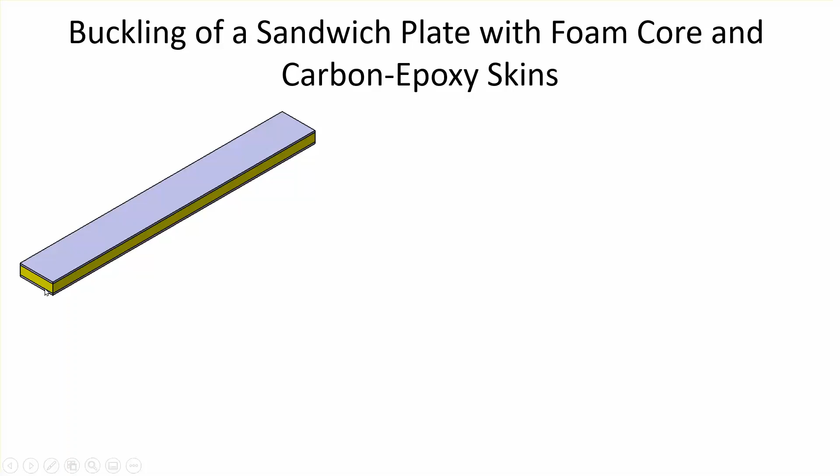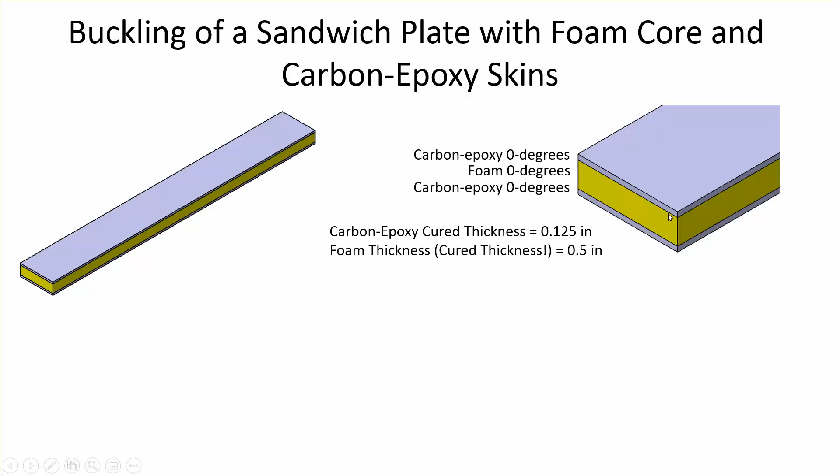The thicknesses are, this is also drawn to scale. The thickness of the foam in the middle is half an inch, and the skins on the top and the bottom are 1/8 of an inch. Okay, so the core is 4 times thicker than these skins. Now, we're going to assume that the edges of this strip, this plate, they're all simply supported, okay? And it's being compressed by a force Nx.

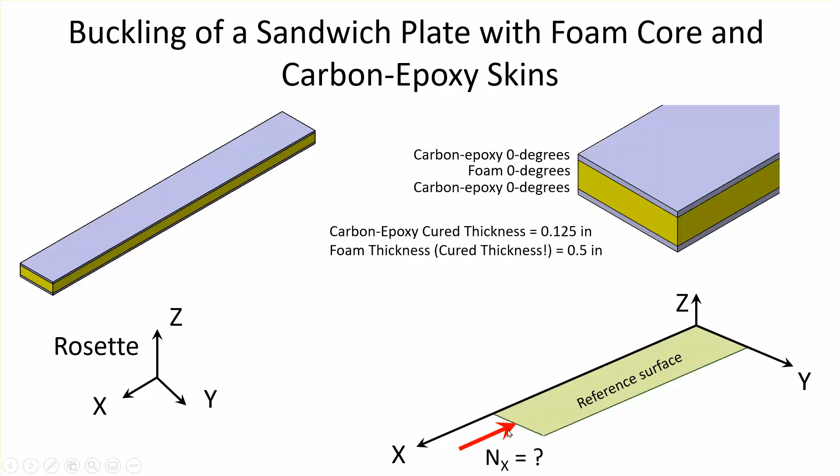And remember, Nx has the unit, you can think about it as force, but for shell problem, you can think about it as force per unit length, okay? Now, in my first video, one of the original drawings had a load on this side too. It was saying compressive load on both sides, but really you don't have to draw that Nx. That Nx is effectively the support because these edges are all simply supported. That Nx is the reaction force due to the simple support at that side. In this segment, I just deleted the red arrow on the right side.

Okay. So here, simply supported on all four sides. The simple support conditions were already given to you in the previous segment, but it's also written here for your sake. Total laminate thickness is 0.75. Remember, the core is 0.5, and there are two 0.125 skins. Okay, the material properties are taken out of the East Carolina's series on hand calculations for composite design, and I'm going to assume that, yeah, the carbon epoxy is right here, and oops, this is not right.

Oh yeah, and then so in CATIA we're going to be doing a 2D orthotropic material for carbon epoxy, and foam is 100,000 psi. It's a little bit high for foam, but that's okay. And the Poisson ratio is 0.45. So I'm going to assume that foam is an isotropic material with these two properties, and the skins are orthotropic like that.

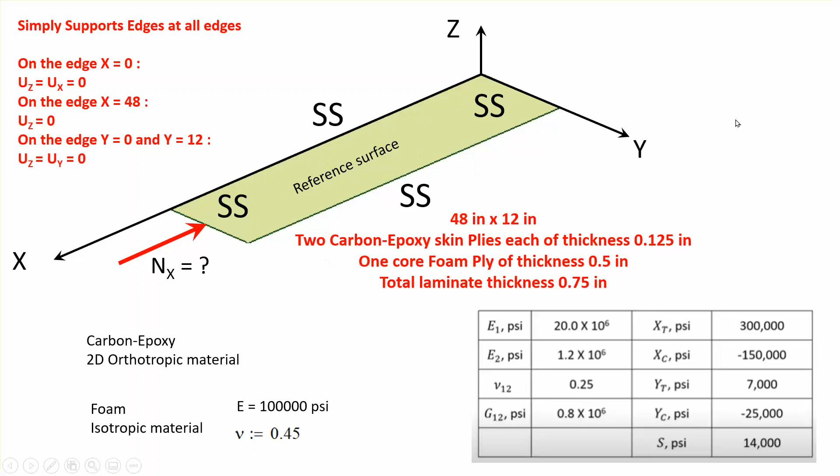Now, I was going to say, because the thickness of this core is relatively large compared to the overall dimensions and also the thickness of the skin, it may be a better idea to do the core, the foam, as solid elements, but we don't have that option in CATIA for composites. So the composites in CATIA, they're all shell elements.

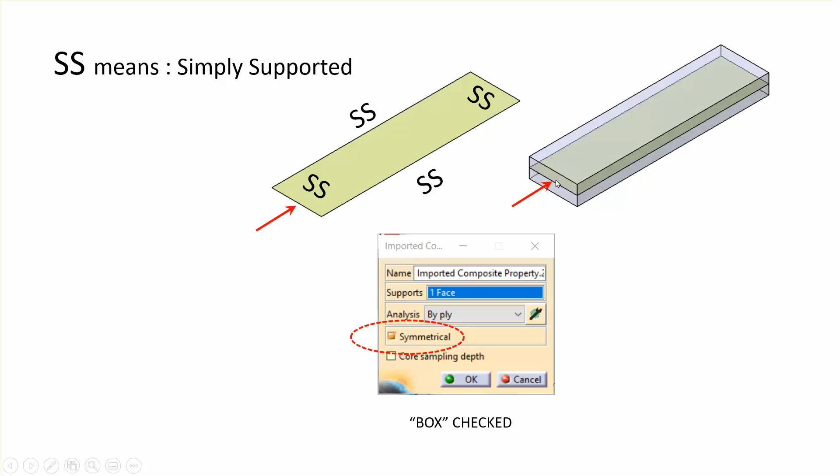Okay. So just keep in mind that when you put this thing together as a stacking of laminas, and later on you have to import it, you make sure that the symmetrical geometry is checked. That means it's symmetric with respect to that middle plane.

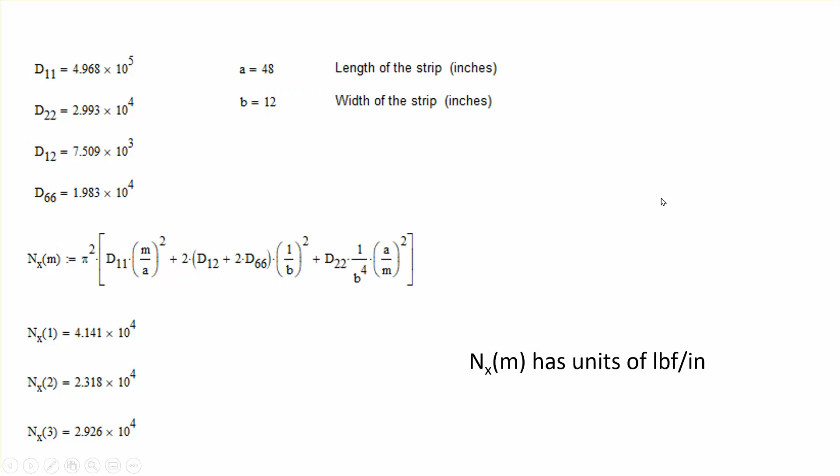Okay. Now, the calculations in that website that I mentioned, oh yeah, they do this problem, except that the Young's modulus of their core, I think, is 10 times smaller than mine. But the formulas that they provide in those video segments right here also apply. So the only difference between what you see there and what I'm doing here, my foam is 10 times stiffer than what they have there. So we're going to compare our results against these calculations, which are coming from theory.

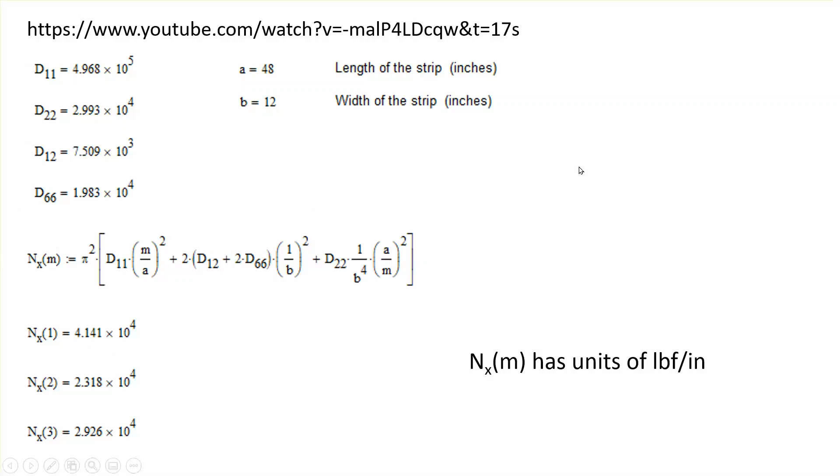Now, this video was done on V5-6R2018, and I want to remind you that if you use earlier versions of CATIA, although the process works, the numbers may not be, particularly as far as the stresses, which we are not interested in for this particular problem. The stresses are meaningless for buckling problems. So as far as the process goes, it works, but we don't have to worry about that.

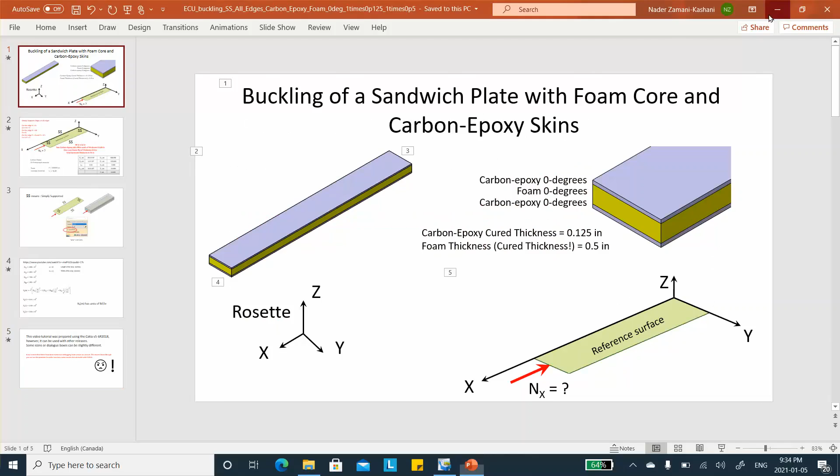Okay. So let me put this thing down here. I'm going to start my CATIA program. First thing I need to do is to create my two materials. And since these are not default materials in the CATIA database, I'm going to have to create my own library. So let me kill this and start with infrastructure, material library. This first one is going to be for carbon epoxy. So I'll say carbon epoxy.

Epoxy, apply. There's a name change. And then the composite has a thickness, remember those layers had the thickness of 0.125, unidirectional. Okay, apply. And then analysis, this is 2D orthotropic. Longitudinal Young's modulus is 20e6. Transverse 1.2e6.

1.2e6. Poisson ratio 0.25. Shear modulus 800,000. And the other two shear moduli 400,000. 5 zeros. And 4, 1, 2, 3, 4, 5. That's it. Apply and OK.

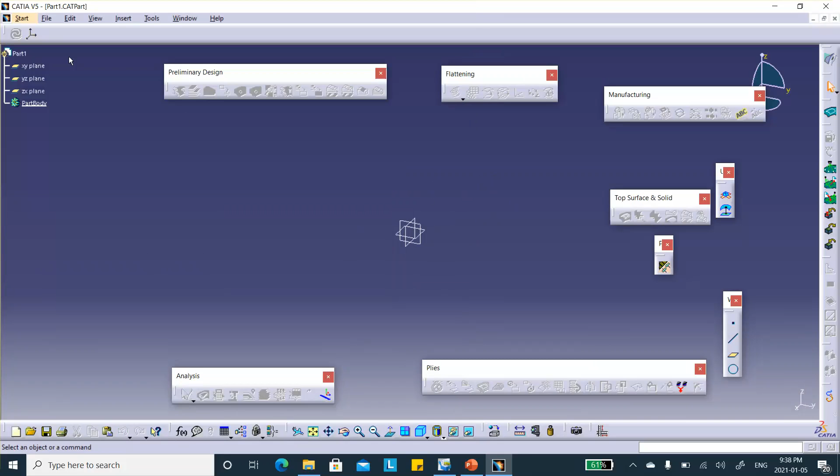So we're going to start making our part. So click on the part. Why don't we save it right away? File, save management. This was the name of the part. Save as, my desktop right there. Carbon epoxy foam core. Okay, we need to go to generative shape design.

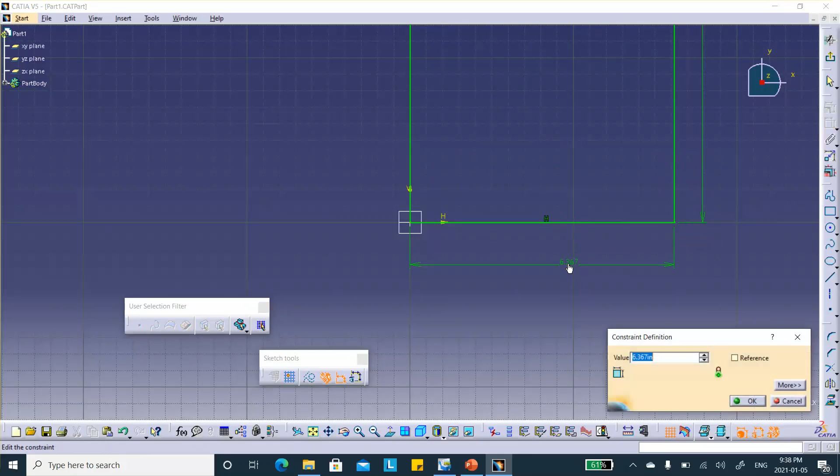On the XY plane, we will draw a rectangle of size 48 inches by 12 inches. So let's do this one first. This is 12 inches. And this one next. This is the length of it, 48. And we can fit it. There we are. Exit. Fill it, F-I-L-L. Join it. If you don't know why I joined, please watch the other videos.

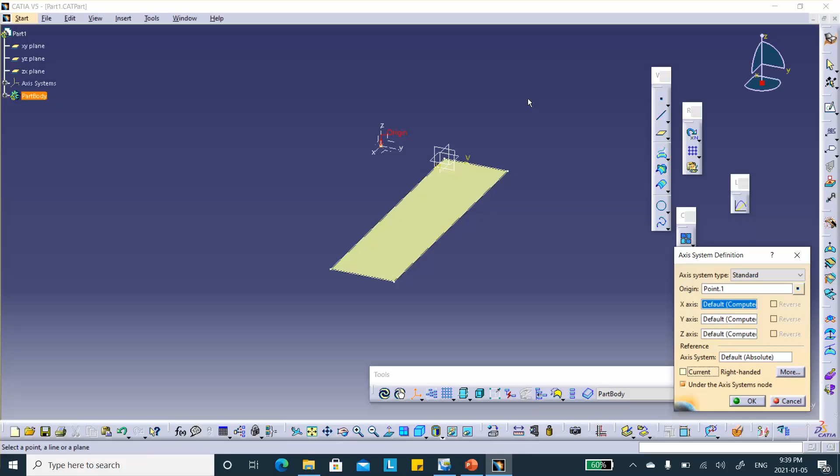Oh yeah, and I create an axis system here. Create a point, -12 for y. The only reason I do this is that I don't want my coordinate system to be placed right there. I want it to be placed off that surface so that I can distinguish it from the surface itself. And make sure this is not current. That means that any XYZ that you specify is going to be with respect to the original coordinate system and not the current coordinate system. Say okay, save everything.

We now go to the composite design. First, we create our composite parameters. Add material, my own library. On my desktop, I created this folder and I created a material right there. There's two things in it. There's the foam and there's the carbon epoxy. I need both of them. So this was the carbon epoxy, thickness of 0.125. Add the material, foam, and there is the foam, thickness of 0.5 inches.

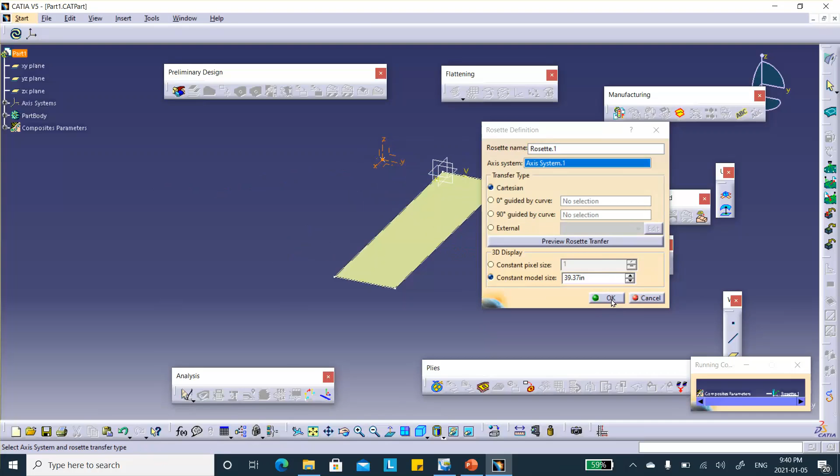For rosette, add a rosette. Go select this thing that we created over here. I don't need it. I hide it. And then we say OK. All right, for our angles, they're all zero. These layers all have angles 0, so we don't need to create it. It's already there. Okay, now we're going to do this thing manually.

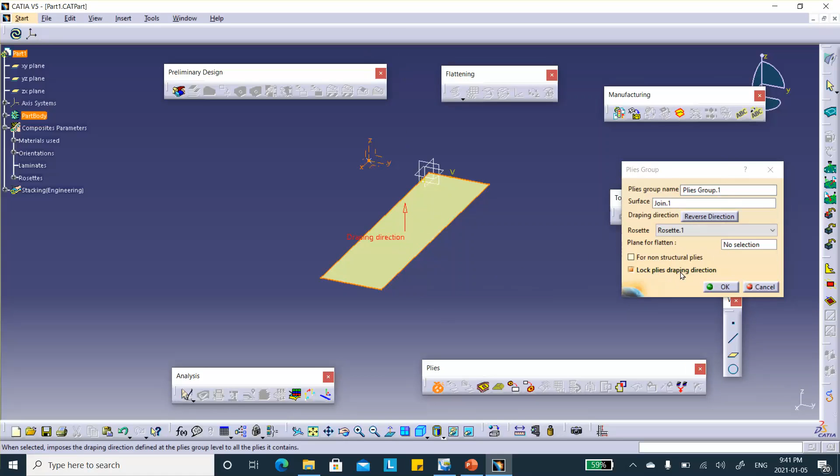So the first thing that I'm going to do is to create a plies group. Surface, or support, is right there. Flip it. My favorite way is draping in the upward direction, and lock plies draping direction. Very good. Okay, now we're going to create our plies one by one.

There's 3 of them. Okay, so you click on the ply right there. See that ply, and it's asking you to go and select the ply group right there. And for the contour, I'm going to use that sketch. Remember I drew that rectangle. You use this. And for attributes, it's carbon epoxy, 0 degrees, and that's good.

So that's going to be my first ply. You can see that it's created right there. The next one, once again, it's asking you to select the ply group right there. For the boundary or the contour, select sketch 1. For the attributes, this one is going to be foam, and the direction is still 0.

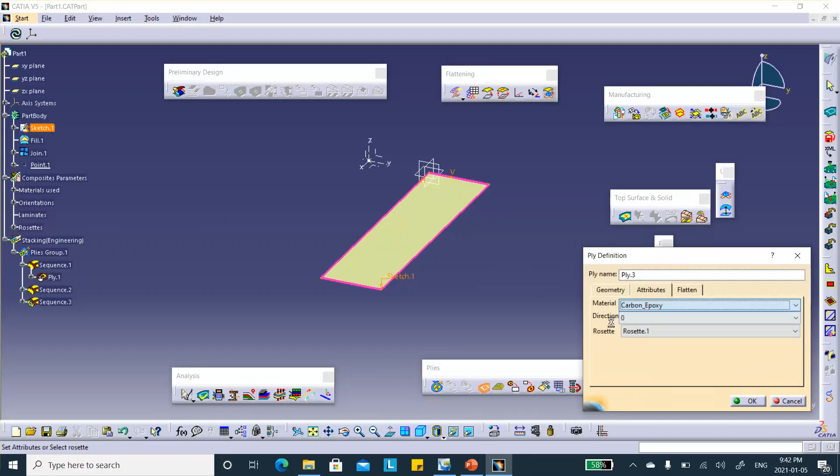Next one, and the last ply, plies group. Boundary is that sketch. And for the attributes, all you have to do is to change the material back to carbon epoxy, and you say OK. And you can always see these things here. You can stack them up on top of each other.

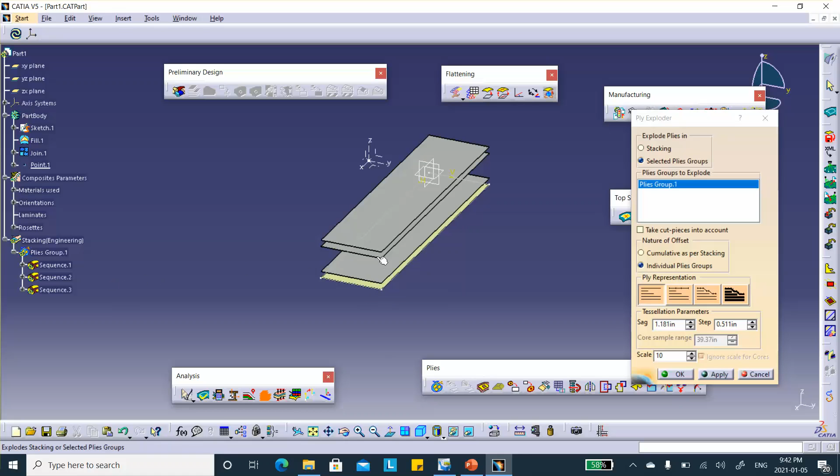Ply exploder, apply. They are all 0, that's why they're all the same color. The distances between these things represent the relative distances between the plies, or the thickness of the ply. So this is 0.125, think about it like that. This is 0.5, and this one is 0.125. I don't need this, so I just cancel it. Okay, good. So save it.

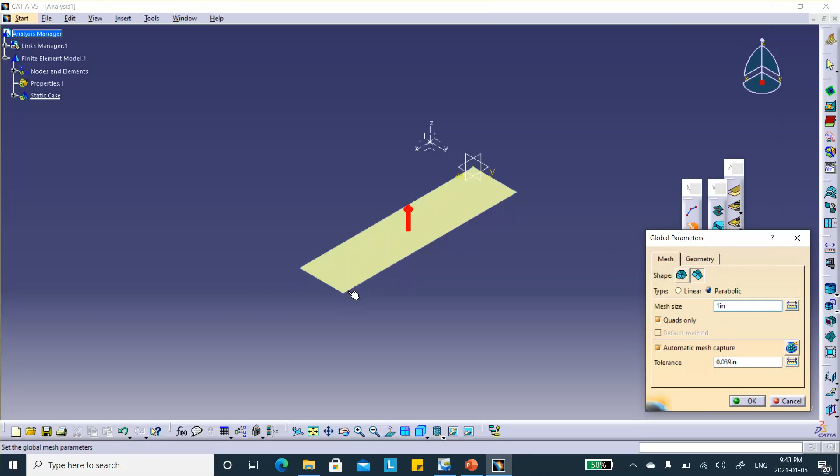We now go to the advanced meshing tools. We use the surface mesher right there. We select the surface, size 1 inch. That means there's going to be roughly 12 elements in this direction and 48 in that direction. Okay, so that's fine. And then mesh it. It's 576 elements, so 12 times 48 is that, and exit. So it meshed it for us.

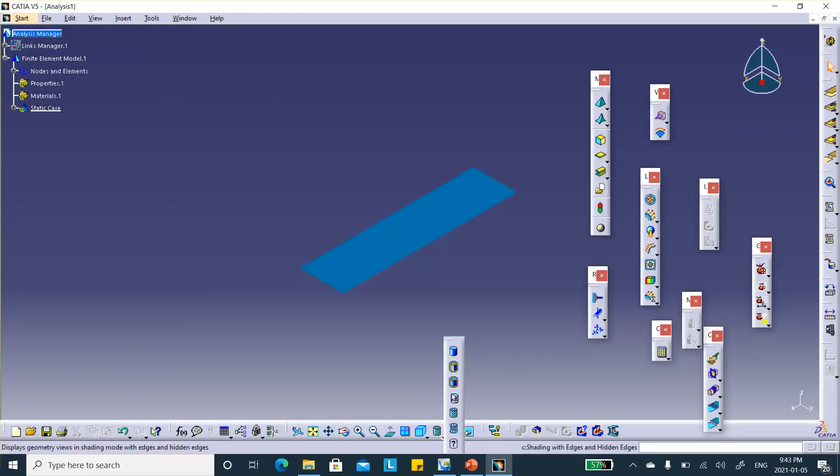So now we're going to go to generative structural analysis. If you want to see the mesh, it's right there, nothing fancy about it. Change the rendering so that you can see the edges, okay? And deactivate this mesh. All right.

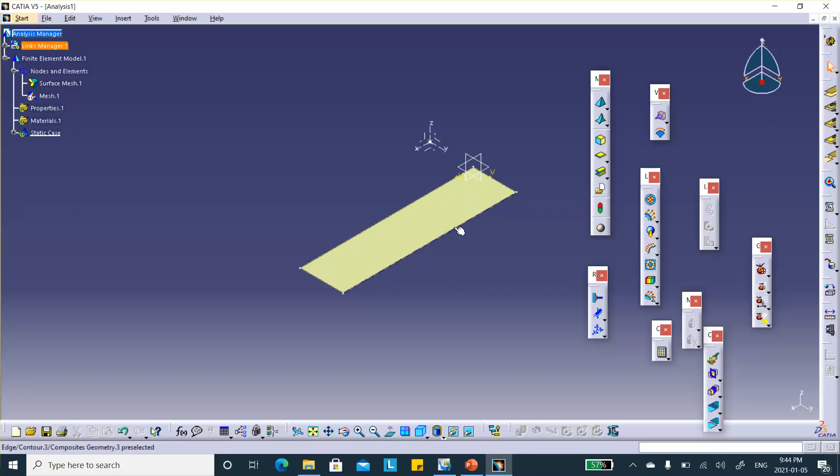Now, I have to apply loads and restraints to these edges, but right now what is blocking our ability to select these edges is that there are ply boundaries sitting here, and there's that sketch sitting here. So what we should do is, first of all, go here and hide the stacking. At least we got rid of the ply boundaries.

Now, there's also a sketch sitting on the periphery here. Notice that when I put the cursor there, the sketch lights up. Okay, so I'm going to hide this. Good. Now I can select the edges one by one.

First of all, let's import our composite properties. So you click on it. It says what is the support? The support is surface. We're doing it by plies. So you go and select that ply group right there. You say OK. Symmetric, because you place it symmetrically above and below this reference surface.

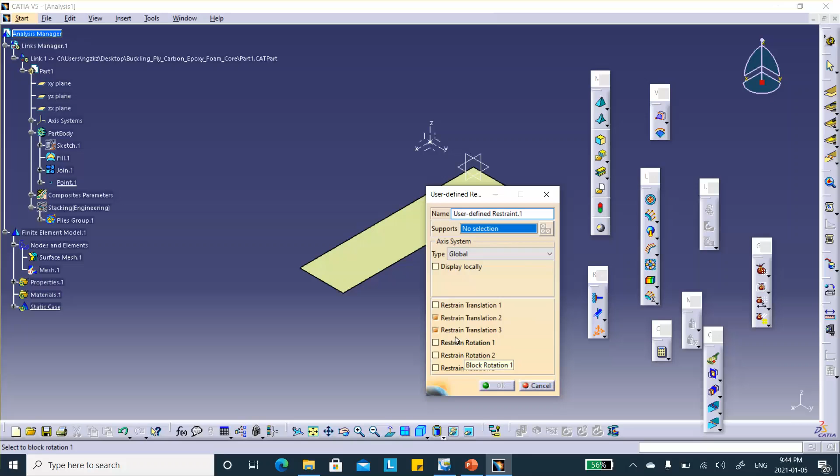Now these are simply supported. We did this in the previous video. So these two edges cannot move up and down, and they cannot move in the y direction. So this is a simple support condition. Let's do the other one. This edge cannot move up and down, and it cannot move in the x direction. Simple support.

Now, as far as the last one on the right side, this should be able to move in the x direction because we're pushing it. So it cannot move up and down, but it should not be prevented from moving in the x direction because you're applying a force here in that direction.

Okay, so now we go and apply a compressive force on that edge. You can apply a distributed force, a concentrated force which is going to be distributed over. But in composite problems, at least the ones that I have made, I'm applying a line force density. That means I'm specifying the force per unit length applied to this edge. I'm applying minus 1 lbf_in.

Now, this is not the buckling load. To do the buckling analysis in any program, the first thing you have to do is apply a static load and run it. Once you run a static problem, then you go and insert a buckling load. So there's going to be load multipliers. Whatever the load multiplier is, you multiply the value that you put in here, which is a dummy value really, in my case 1 pound.

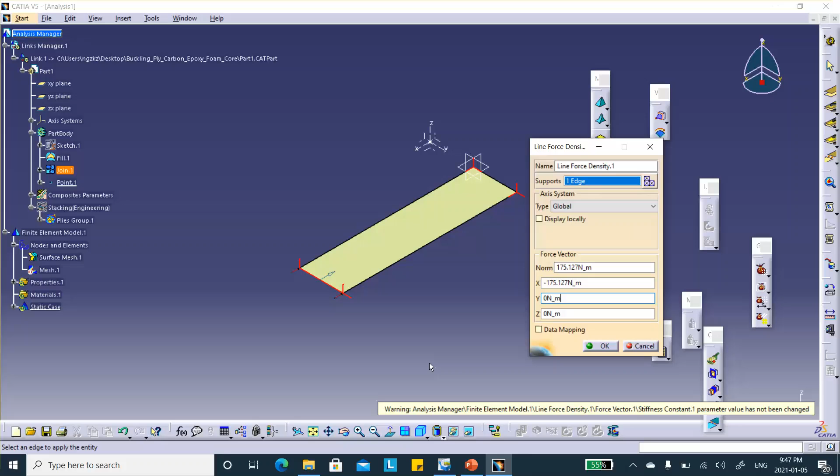For example, if I get a load multiplier of 1,000, then I take the force I put here, which was one pound per inch, multiplied by 1,000, and that's going to be your buckling load. Okay, so this is fine. This first step is required, but it's a dummy step needed to do the buckling calculation. We're going to run it.

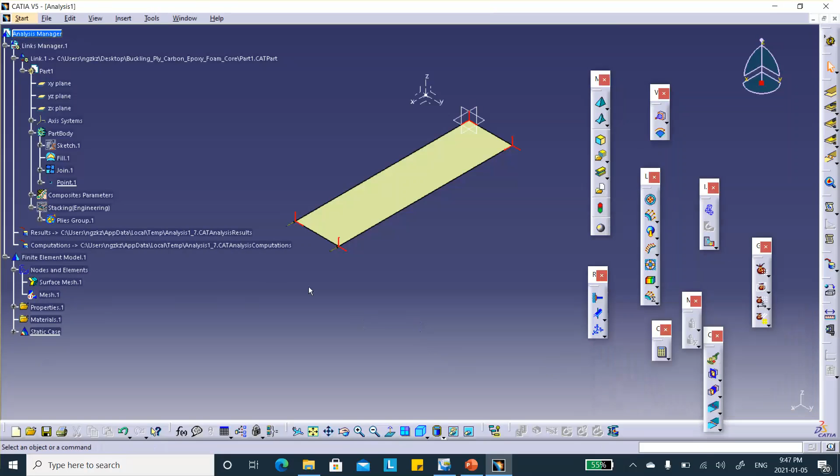Nothing fancy is going to happen. This is going to get compressed. That's all. And you can see that. You can see it gets compressed. There we are. Okay, so good. We need this because in order to do buckling, you need a static case solution. And we did it. It's right there.

Okay, so you go now and say insert buckling case, and notice that it's expecting you to select a reference solution, static solution, and the only thing that you can pick from this tree is the static case that you ran. Static case, notice it puts it there, and we say okay, and then we're going to run it.

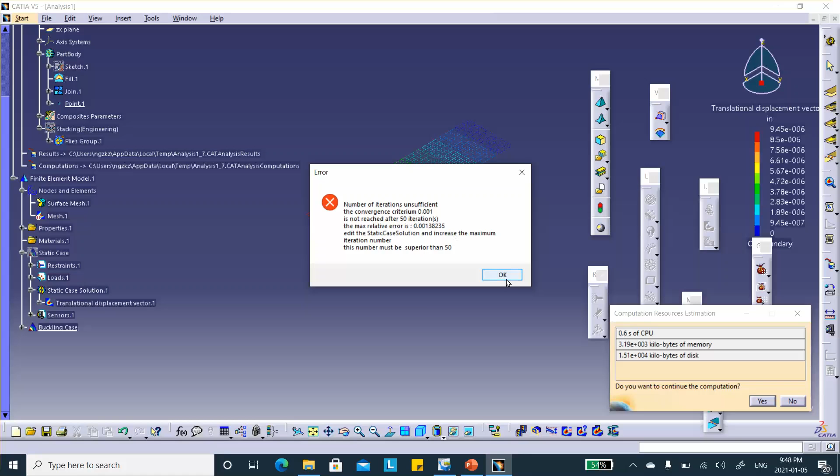Okay, now this particular problem said number of iterations. Usually you don't get something like that, but it can happen, no problem. It says number of iterations insufficient. Fine. You say okay. So I'm going to double click on this buckling case. It's not here. Where is it? Double click on this buckling case, and instead of 50, I'll put 100 iterations. Generally speaking, you don't run into a situation like this, but it could, and I did.

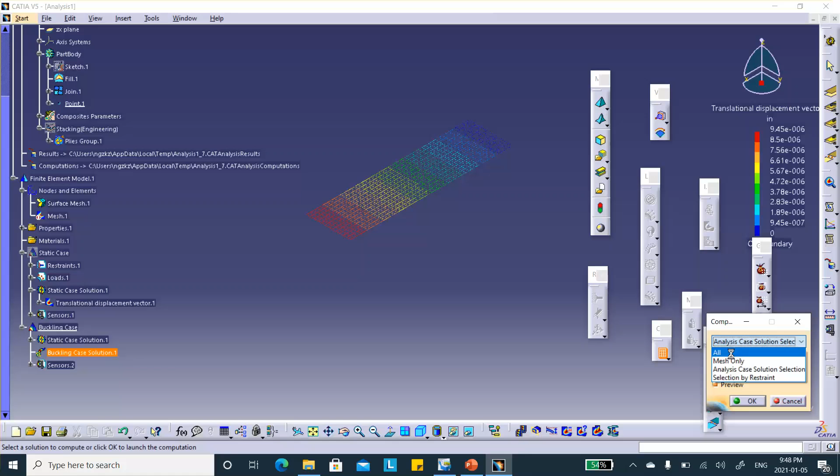So I'm going to say run all of them again, even the static one, although it was not necessary. This time I didn't get the message. So I'm going to say show me the buckled deflections. There we are. Double click on this, select the occurrences. It calculated the first 10 buckling loads. Usually only the first two are important. The first one is important.

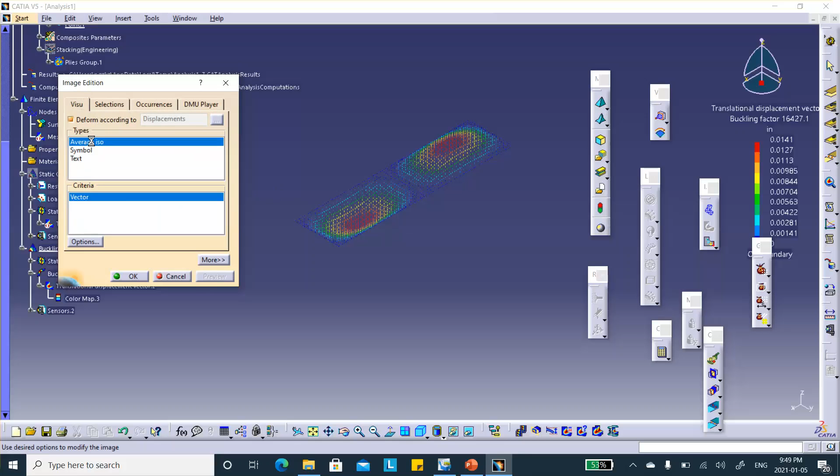And in this case, let me change the rendering here. It's easier if you see it like that. Change the rendering here to material shading. Okay, so notice that one part of it buckles down, the other part buckles up, warps out. And if you look at the occurrences, it says, all right, this is your buckling load factor. Go and multiply the load that you applied on that edge by this number.

And if I do that, it's going to be 16,427. It's going to buckle in this form. So 16,427 is our estimated buckling load. So if you go to these slides.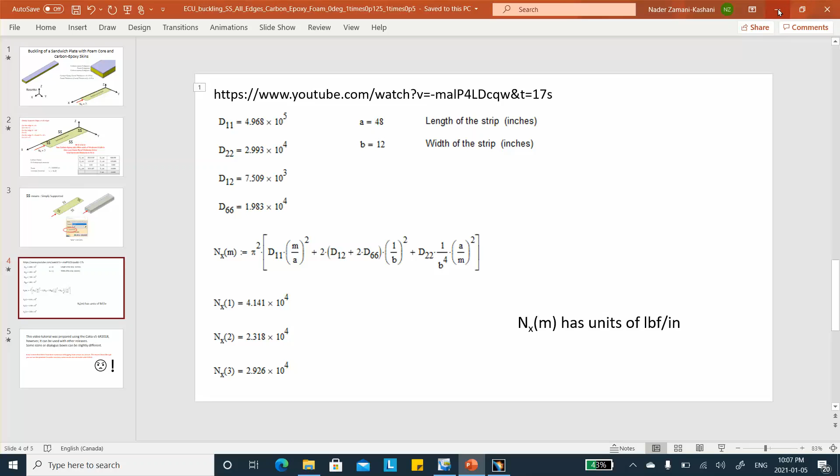Now, part of that one may be able to attribute to the fact that these calculations were based on the assumption of the classical laminate theory, where there are no significant shear stresses through the thickness. But when you have a thick core like that, made of foam, one may need to anticipate some issues because it's a relatively thick plate, and in thick plates, shear deformation is important. But anyway, it's not discouraging.

However, as I pointed out, having such a big thickness in the core, in the laminate, may not be a good assumption for using shell elements. Okay, folks, so obviously these are the higher critical loads, and of course, usually the first few are the important ones; you never get to that point, the structure fails.

The other thing you should keep in mind is that even if you trust this number 16,000, you might say, wait a minute, 16,000 pounds per inch. This is 12 inches. So you take 16,000 and multiply by 12 inches. That's a significant, large load that we're talking about.

Yes, but remember, these are all non-conservative estimates of buckling load because the laminate may actually fail well below this buckling load due to other modes of failure, for example, delamination or cracking, etc. So this is like the Euler buckling load that you calculate for beams. Those are non-conservative. The beam will definitely fail, not even reaching the Euler buckling load. It's an upper bound.

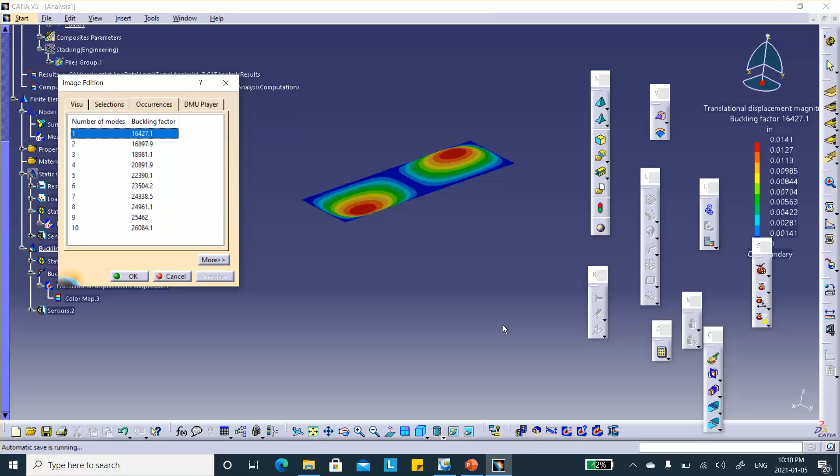Okay, there will be one more video segment that I'm going to be doing on buckling. However, that one is a bit more involved. It's like a fuselage of an aircraft with a window cut out in it. Basically, it's a cylindrical surface with a hole through it.